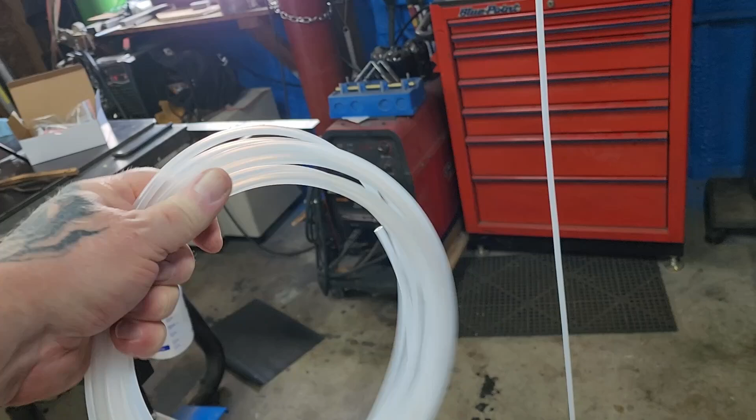So I got a lot of coil in that tubing, so I'm trying to straighten it out. That's one section of tubing that will extend between the radiator blocks. So I'm applying some warmth to it and just kind of massaging it. It's not going to be perfect, but the straighter I can get it, the better.

In the middle part, I'm going to go ahead and put a bend in it just to make sure that I can come from here, wrap around, and go back in. I'm just working at it. So I got 18 of these I got to go through.

Once I get them like this, then I can start getting them fed in. I got these kind of secured for now with that. These will be glued down.

Okay, so I got all of these cut and straightened out. Murder on the hands. So I need to still have a way now to kind of hold these up so they're not all sagging down, but I think you can kind of get the visual now.

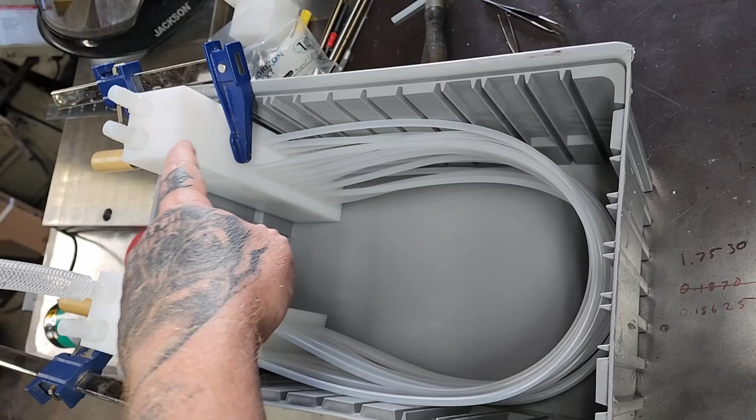So this will have water up to here, so water will flow in, split, come into these two channels, through these tubes, around, out, back into a splitter, and back up to the anodizing tank. So now you can kind of get the idea of how this is working.

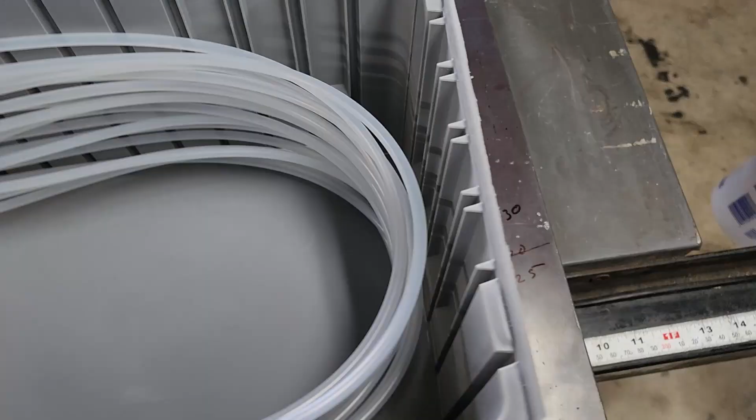So the next step is to get this ready for glue once this is all glued together. And then I also have to figure out how I want to go about supporting these hoses so that they stand up a little bit. They're all a little different in length here because the holes that I drilled and reamed, they're all kind of different.

I didn't set the stop on the milling machine like I should have, relying on tape on the bit instead. But it's no big deal. It doesn't have to be perfect, you know. There's plenty of water to go around. So I think I got plenty of surface area.

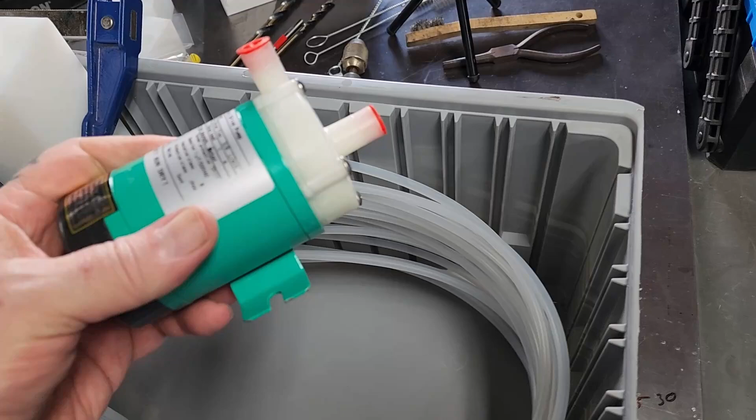And then what I've got is, this is the pump. So I got two of those, and I've got one pump which will circulate for this, and that pump will be hooked to a temp controller, so when the temp gets to 68, 69 degrees, the temp controller will turn the pump on, circulate the anodizing bath through here, back to the anodizing tank, and cool that down.

Once it gets back to 60 degrees, whatever I decide, then it'll turn off. The other pump will circulate the anodizing bath, the electrolyte inside the tank, and just keep it moving while I'm anodizing. So that's pretty much the deal.

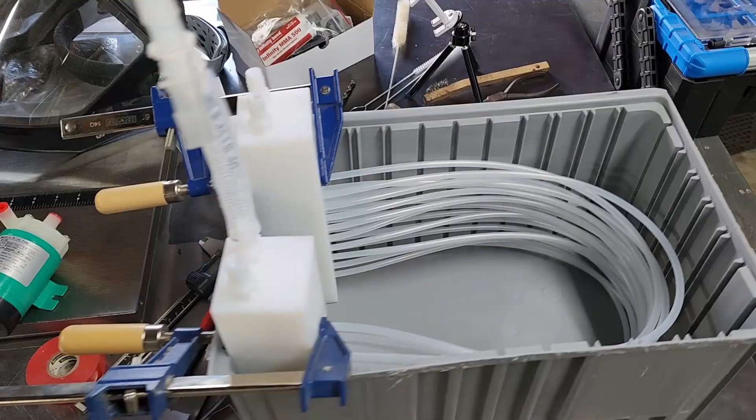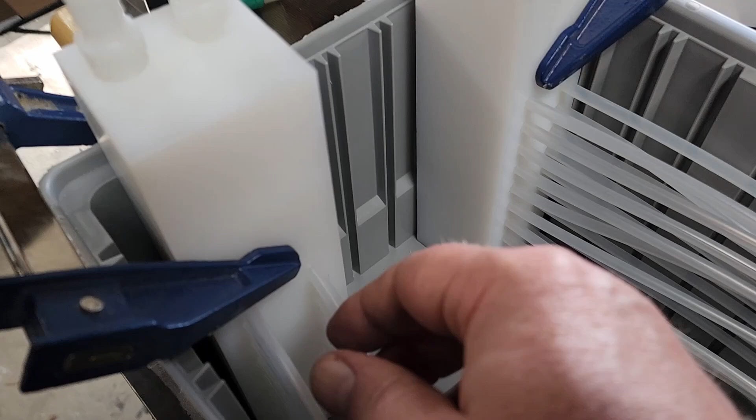I'm not going to be ready for gluing today. I'm thinking maybe Saturday. It's Wednesday today. I have to think about how I'm going to glue this tubing in here, because if I just put glue on there and then push it in, it's just going to squish all the glue out. So I have to do a little thinking on how I'm going to make that work.

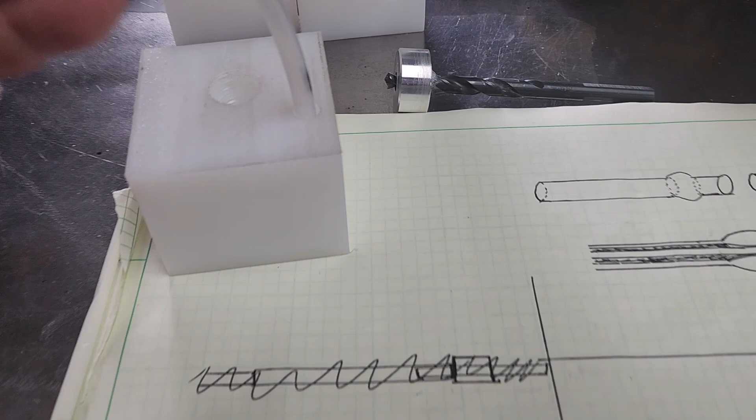All right, so I figured out what I'm going to do. I don't know if you can see real well, but I got a pocket drilled in the hole there. This is my test hole.

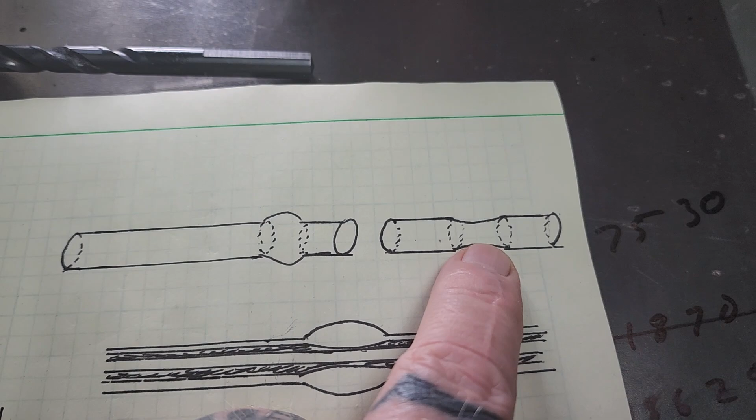So what I was originally thinking for these holes, in order to glue this tubing into the radiator block, my initial thought was inside the hole there, I would cut out a little pocket like that and then chamfer the tubing, and then when it plugged in, I'd have something like that. So that dark area is the tubing, and then the glue would fill in there.

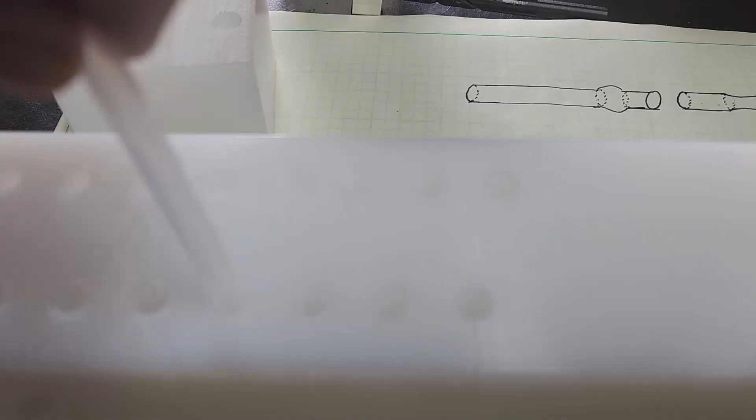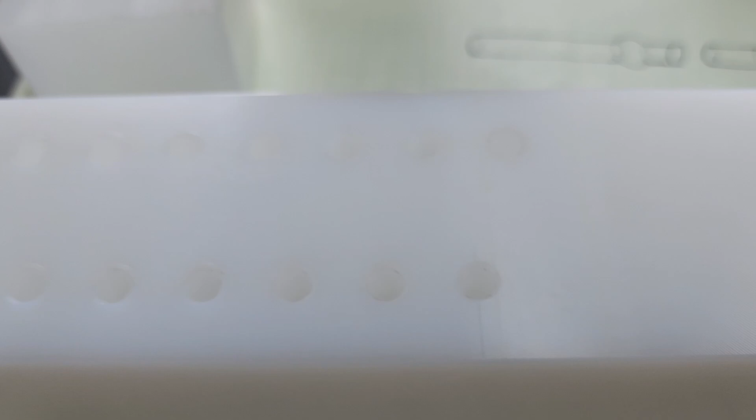But of course, the problem is that it's a really snug fit, and to get any glue in there, it's going to be really hard. It's just not going to want to go in there no matter what I do. So just gluing on the tubing and then pushing it in is not going to leave very much glue, if any. It's like I'm just going to wipe it right off. So I'm sure I'd get some glue in there, but it wouldn't be nice and full.

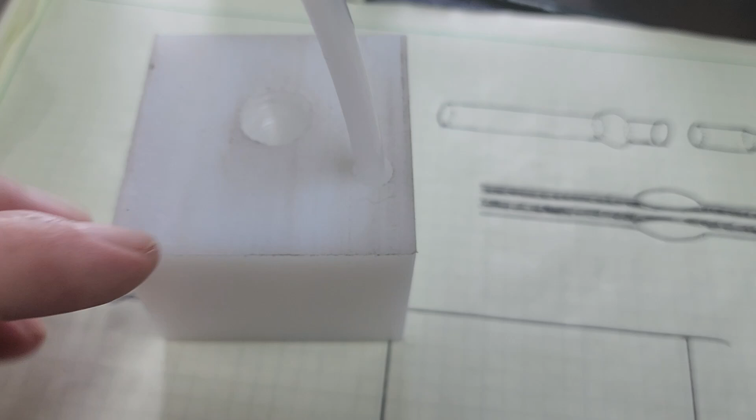So the idea is that I will partially insert the tube, not all. I'm not going to push it all the way down. I'm going to only get it started in the hole. Then I'll apply the glue in the pocket, and then once the glue is applied in the pocket, I'll push it down. And that'll give me a large amount of, a decent amount of glue.

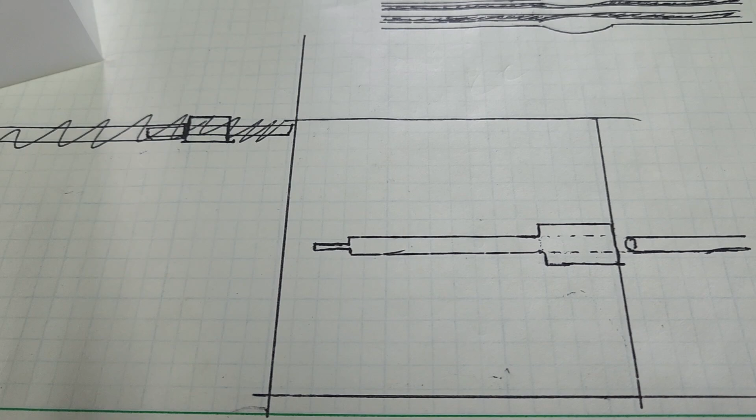It'll be fully glued. With the tubing, I'll just scruff it up a little bit, and that should help give it some extra surface area to hold. And then that's the size of the drill bit.

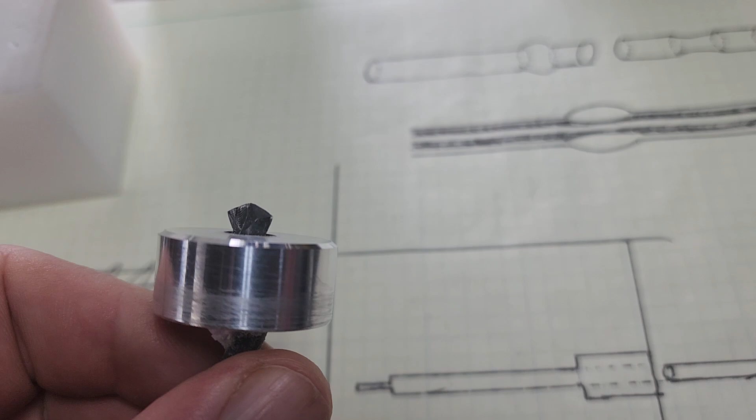And instead of using tape, I had to make a hard stop because this will grab and go much deeper than what I want it to. So I only want it to go that deep. So I made that hard stop and kind of glued it in there with super glue and baking soda, but it should be fine. And then after I'm done, I can knock the thing off and that glue will come off.

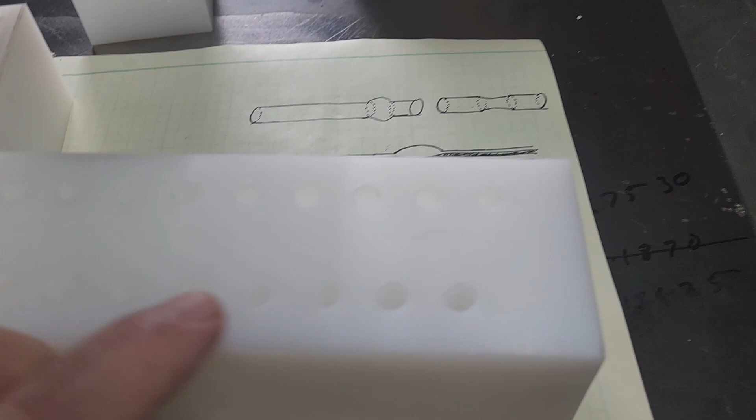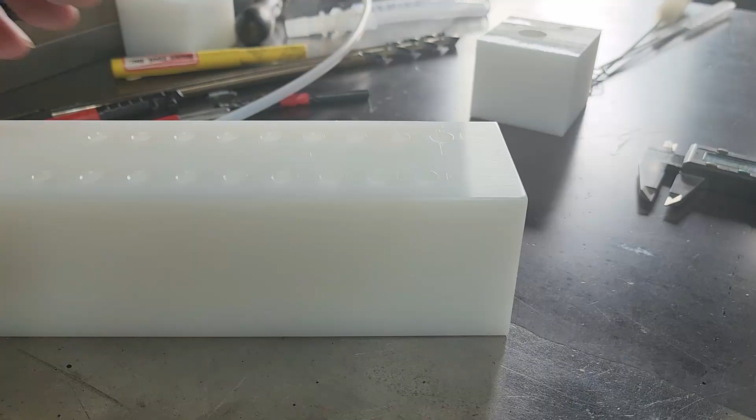That's the goal for today, is I'm going to be drilling all these out, getting them ready for glue. I have one other thing that I'll need to make, which I'll show you later in the video. Of course, the plastic embeds itself inside there, so I got to pick it out before I go to the next one. Really hard to see.

Yeah, that worked out really well, with the exception of having to pick the little chips out of the drill bit after each time, but that's pretty good. I'll give that a little deburr and that'll be ready to go.

The other one, I'm just going to do off camera.

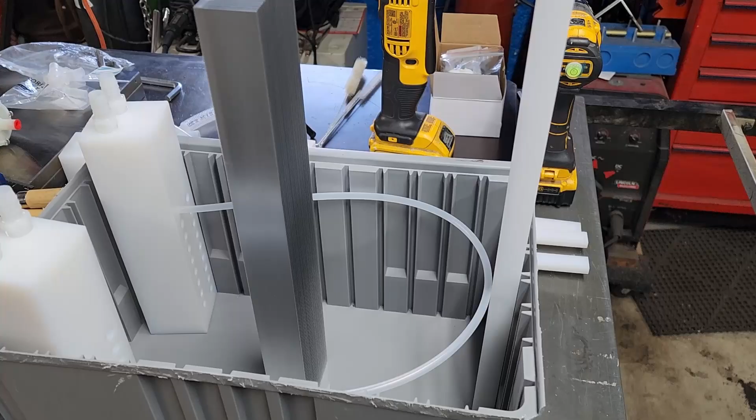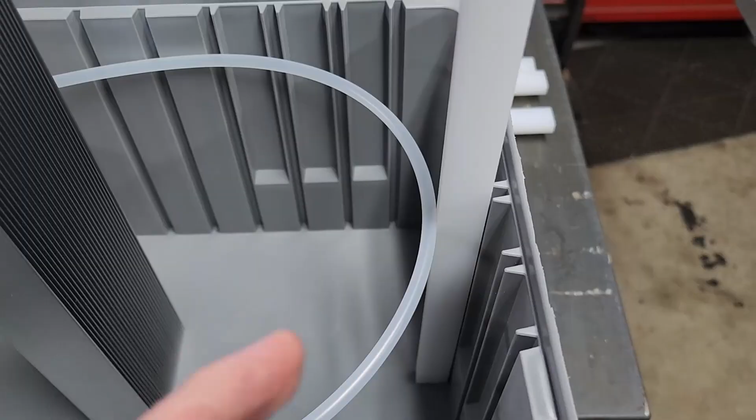Well, I had to order a few things, like this plastic strip. Got a bunch of it sitting over there. This, of course, will be cut down, and I'm going to drill holes down there so that it'll basically hold the tubes up. It'll support them and keep them apart from each other, because they kind of bunch up at the end and sag down, and that's not what I want. I want them spread out and supported.

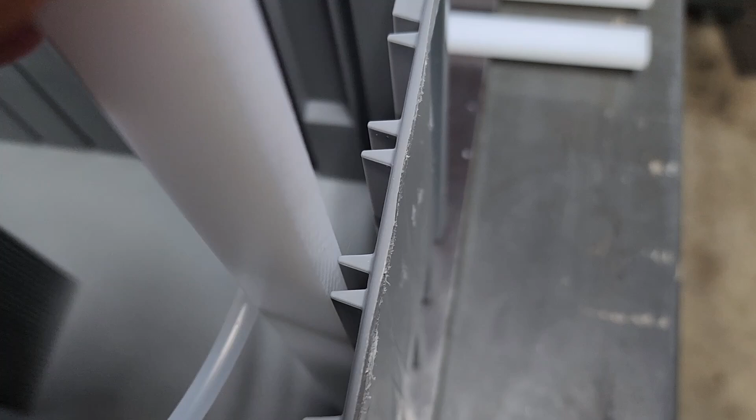Little problem is this is the center point. I'm not sure how I'm going to glue that to there. I'm probably going to have to create a bit of a base for this to sit on. I'll have to think about this, how that's going to go.

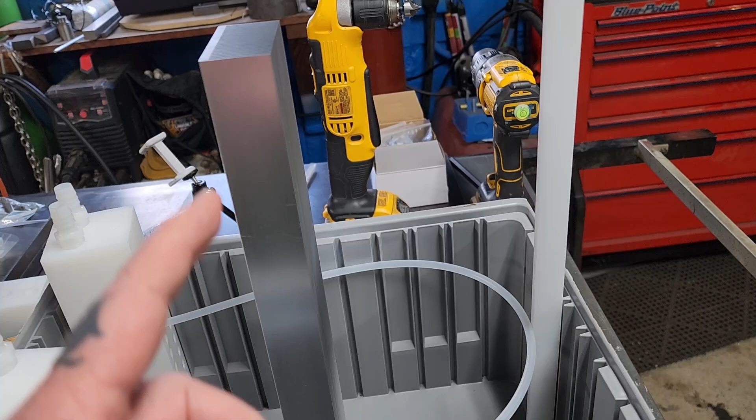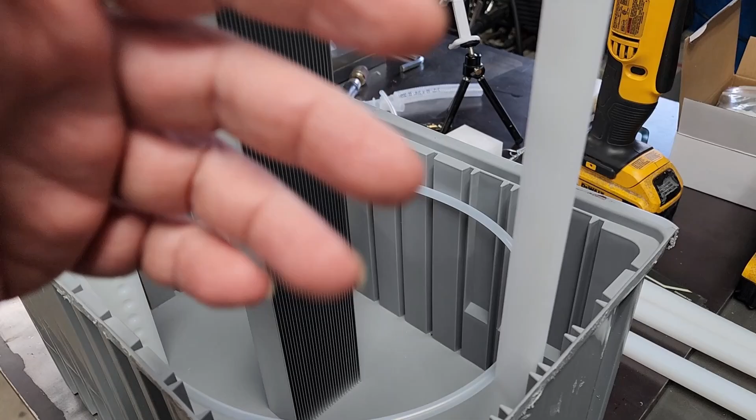And then I got this really, really long heat sink. So this is all going to sit in the mini fridge. This is definitely, I'm pretty sure, going to be too tall, so I'll have to cut it down a bit, but I'm going to keep it as tall as I possibly can. There will be a little electric computer fan that will be blowing the air around. The deal with this is to aid in cooling the water as quickly as possible.

And I might get another one of these just to have two in there, because as it stands, this isn't really that conductive. So the surface of the water will take most of the cooling from the air circulating around. This will get hit with the air and transfer that cooling deep into the water. That should help quite a bit.

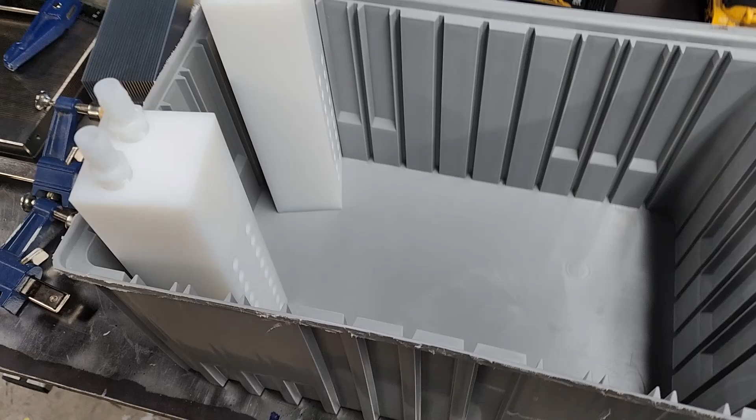So the next step is to prepare for gluing these blocks. They have to be laying flat down, so these blocks will have to be laying down when I glue them, because otherwise the glue will run out. So I am going to have to glue in 2 stages, unfortunately. I got 2 nozzles in the glue, so we'll have to make them count.

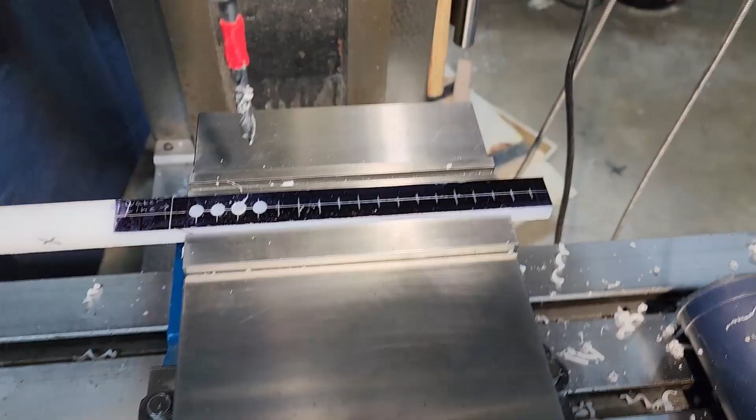Almost there. Got a little bit of planning to do, a little bit of figuring out, and then we can go forward. So this is what's going to hold the tubing. I've marked it off. Got 18 holes I got to drill and ream.

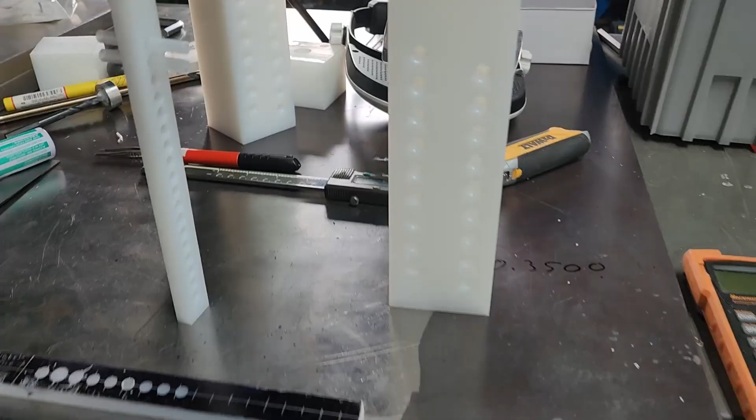That's the water line, and then I'm going to cut it off right about there. So I have this piece done, drilled and reamed.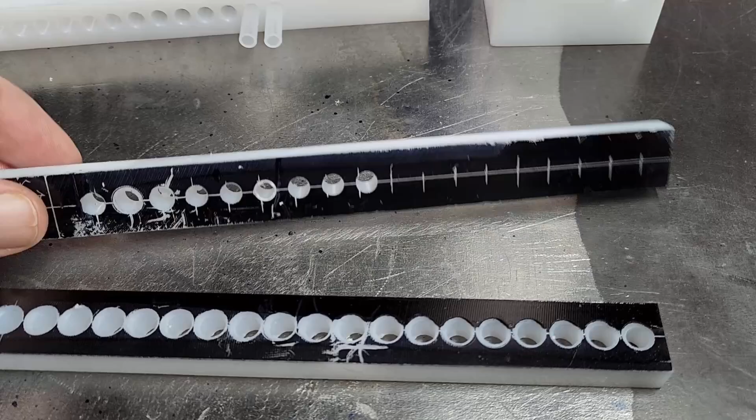So this was the first mistake, and as you can see, my drill holes are extending where they shouldn't have gone, and I measured and realized that this wasn't going to come out right because I had 18 holes. There's 18 holes here.

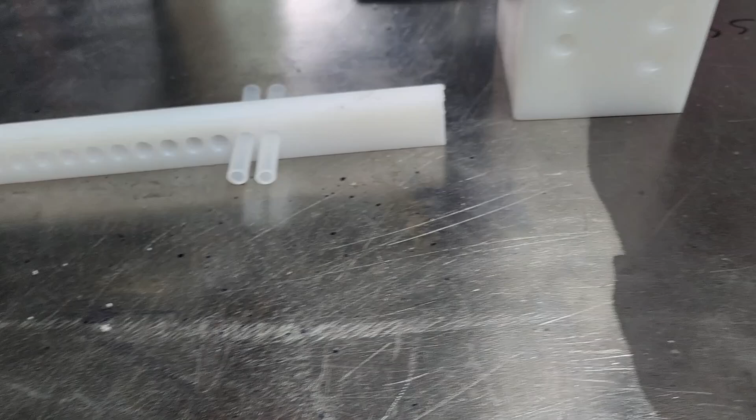Well, as you can see, that's the water line. So those tubes have to be between the water line and the bottom of the bucket. So yeah, I would have run out. I wouldn't have been able to make a full 18.

This one came out, I somehow messed up. I don't know what I did. I started with this hole first, and I ended up going all the way down to here, which was lower than what I should have. It should have ended like that, but I figured, that's fine, it's not a big deal. The tube will go in there, no tube, water can go through there, whatever.

But then I went back here and I had to drill that, which was fine. But what I did wrong was I took it out of the milling machine and I hand reamed all of these holes.

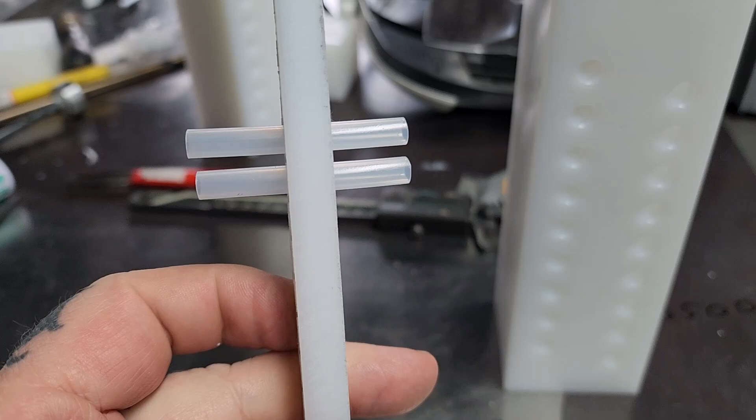So those tubes, when I test fitted them, let me see if I can prop this up here. As I was test fitting them, the tubes were sitting at an angle in all the holes. So when I hand drilled it, I drilled it crooked, or hand reamed it crooked.

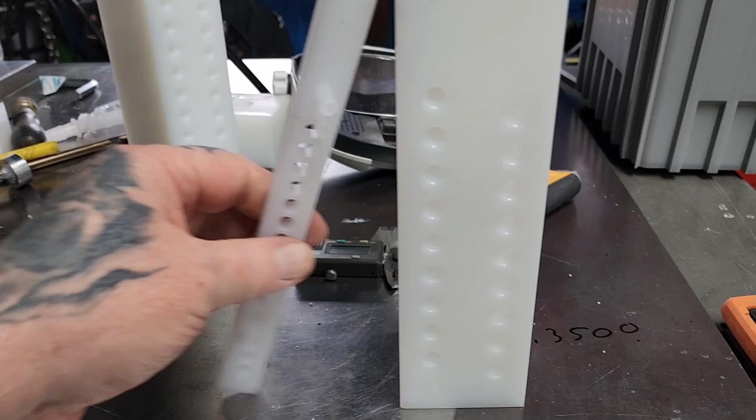So I had to scrap that because I need them to be nice and straight and square. This was the 3rd attempt - 3rd time's a charm. I usually don't make mistakes and have to repeat myself like this, but I had the extra plastic, thankfully I didn't have to order more. So there it is, it's all done.

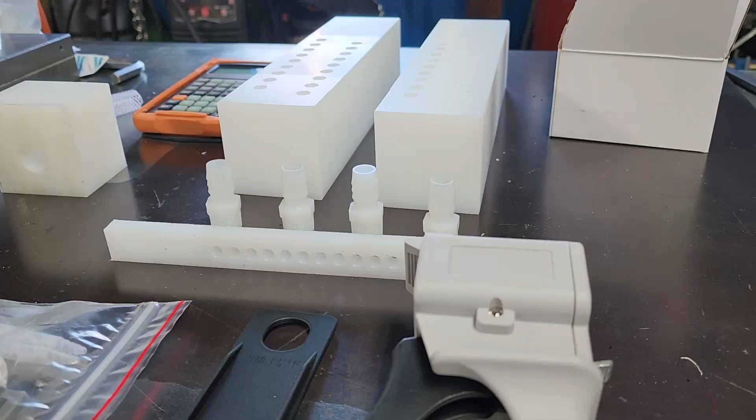I am at the point now where I can start gluing, so everything needs to get washed up really well, and then we'll start gluing stuff together. So I've got everything ready to glue.

I re-cleaned these radiator blocks, and I went in each hole with a bristle brush, cleaned it real good with dish soap, let it dry all day. I cleaned the threads on these. I didn't clean this because none of this is going to get glued - this is just going to hold up the plastic tubing.

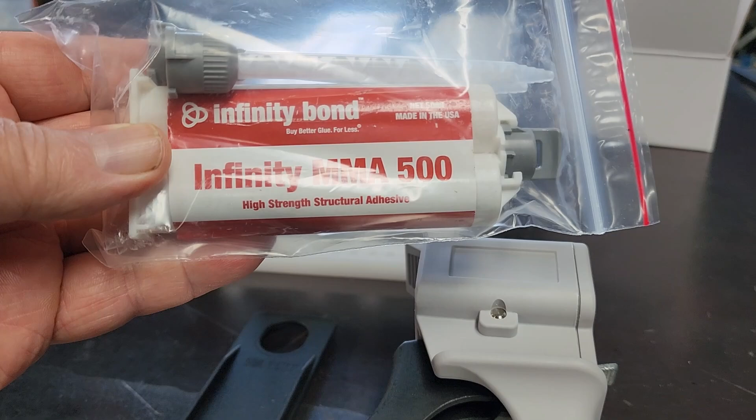The glue is the Infinity Bond, Infinity MMA 500. They have different glues for different plastics, but this is for the polyethylene plastic.

So the first gluing that I'm doing is going to be the tubing into here, and I have to have these laying down. I'm gonna do these first and then put my tubing in. It has to be laying down, and I'm also going to do a test gluing in that hole there. So when it's dry, I'm going to see how much it will take to pull out, because I don't want to have to do it to one of the holes.

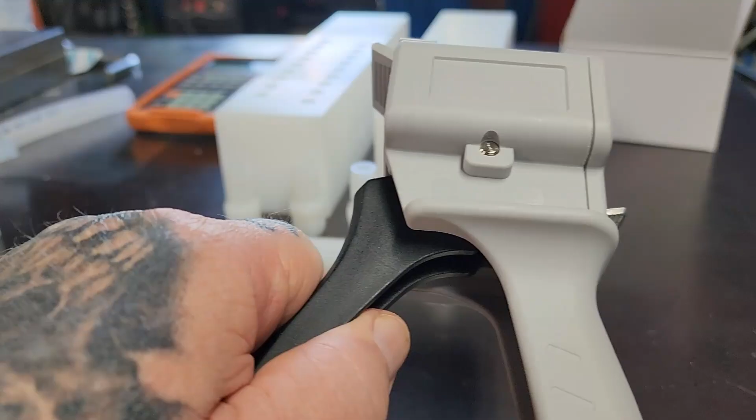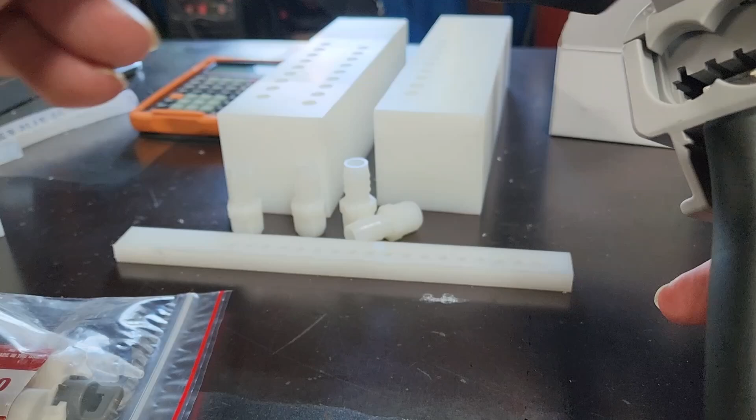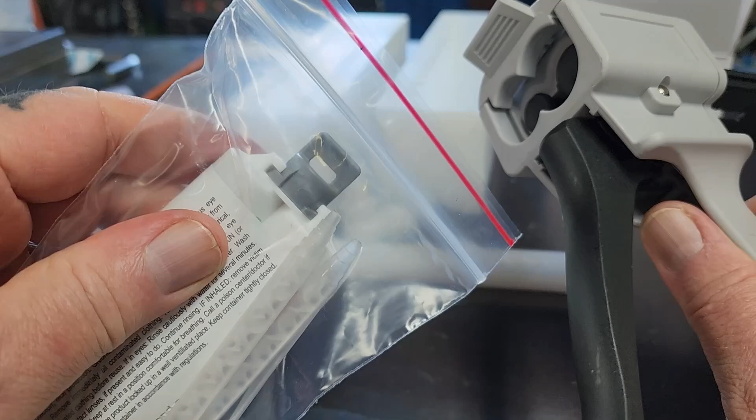This glue thing here is pretty interesting, really nice quality. You've got this pusher stick, and on the back you've got this little thing that releases the lever, and this only goes in one way - see the little doohickeys there? That's how that fits in, like so, and then this is going to go and plug into here. And this also has a nice cap so I can reuse it, because once I use this nozzle, it's done - I can't come back to it the next day.

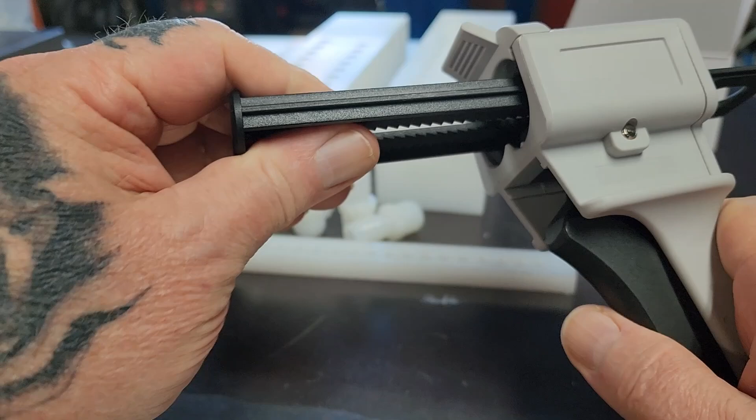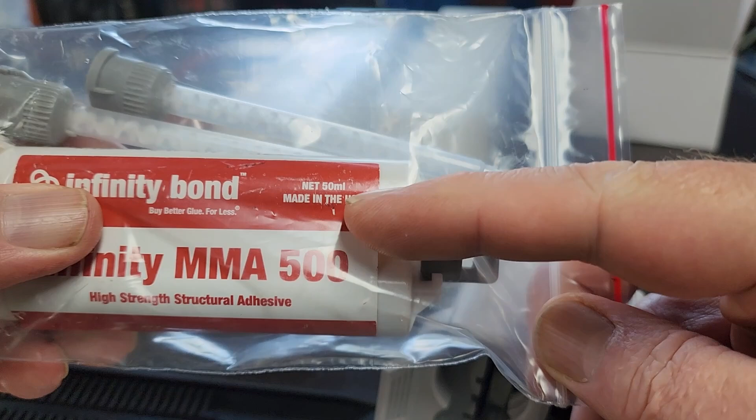It's throwaway after that. I believe you can use this on other glue things that are like this, other two-part adhesives you buy - I'm not sure, but I'm pretty sure. It's pretty straightforward, very high quality here. I mean, this is really nice, it's heavy, it's not cheap at all. And one thing I really like about this is right there - made in the USA.

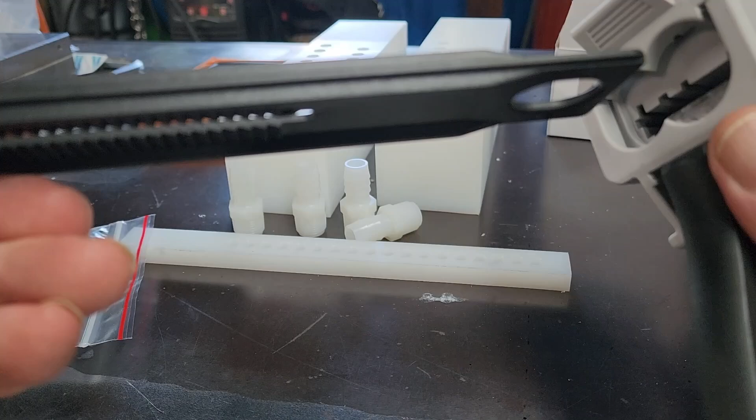Take that, China. So just go ahead and load that up.

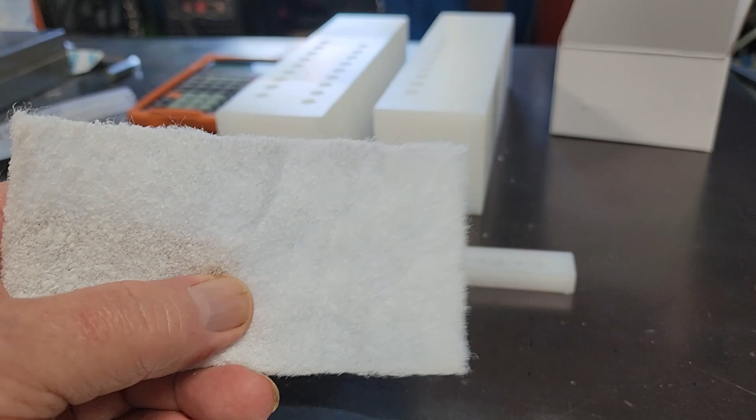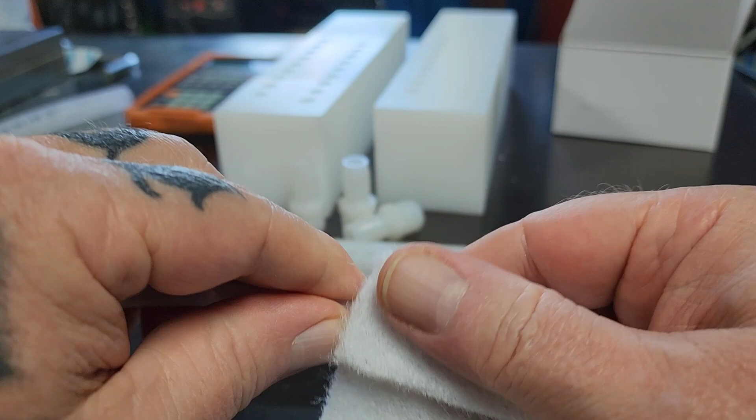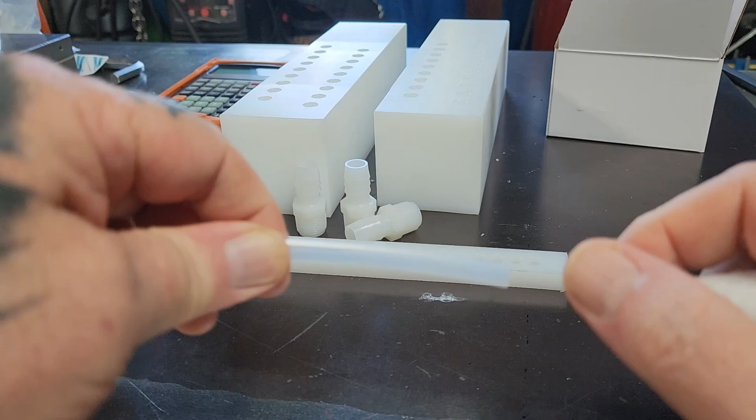So I got some scratch pad, or whatever you call it - it's mild, and I washed it really good before I decided to use it. What I'm going to do is on the tubing end, I'm just going to do that, and that should give me some scratches on there, give me some surface area. Kind of hard to do in front of the camera here, but I'm going to go through all the tubing, so when I glue these holes and push this in, the hope is that, because I'm going this way, the lines are going around, I'm going to trap some of that glue on here, so as I push it down into the hole, because it's such a snug fit, hopefully I'll trap some glue into the snug part. But as you can see, I've still got the wide part, which is going to hold the majority of the glue, and I still want to have surface area on there because this is such a small piece, so I want to give it as much surface area as possible for the glue to hold on to.

So I gotta do all that on all the pieces of tubing and kind of see how this works. I might have to go to a rougher piece. So I'm going to work on that a bit. It's boring, I'm not going to video it - I'm just going to get it done.

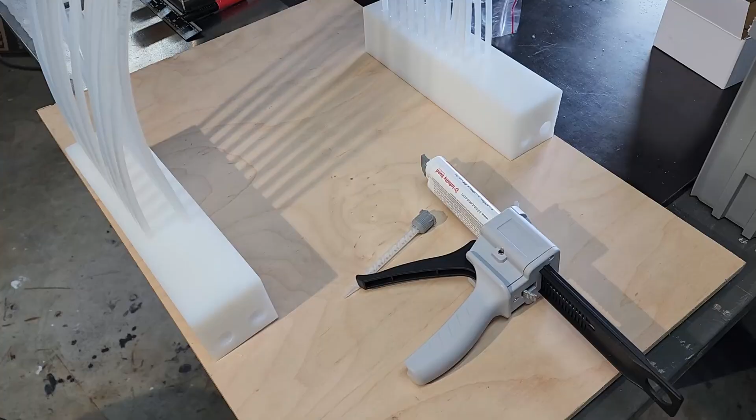Well, here I go, I'm ready to glue. Did a little test to make sure I could get in all around there, and I can. So I don't have these all the way pushed in. I'm going to go ahead and get the glue in the little wells, and then I'll push the tube in. I'm going to start here with the little pipe fittings, and then I'm going to end up here. There's the separator - that doesn't have to be glued.

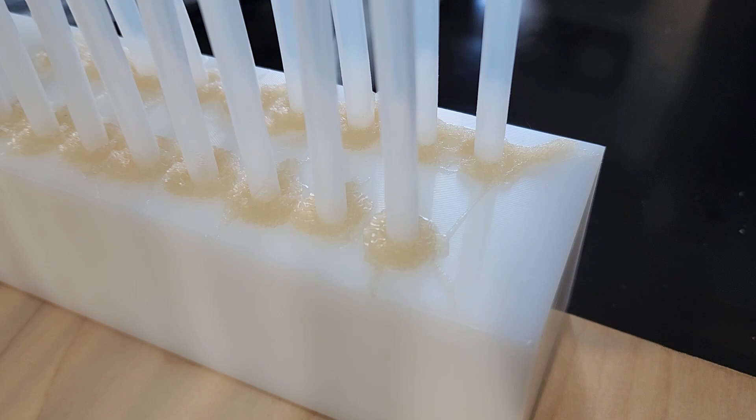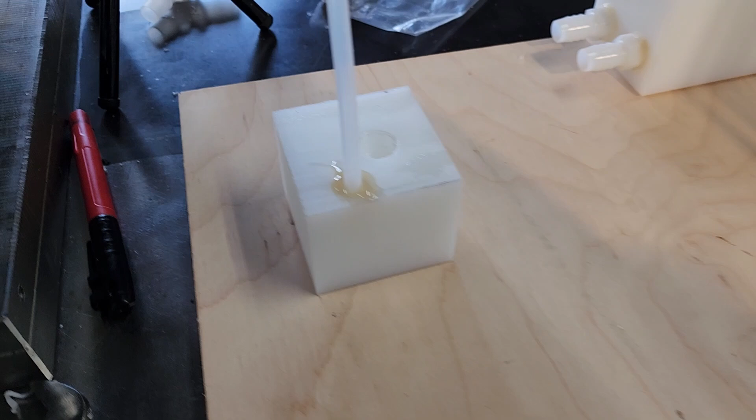So there it is. The glue starts to set a little faster than I would have liked, and it looks like it foams a little bit. I don't know how well I was able to get it down in those pockets - I probably should have drilled larger pockets, but with that foaming action, and plus pushing it down, I think it got in there just fine. Not the prettiest, but it just needs to work. There's my test. I'm going to give this a couple days and then I'm going to yank on it and see what I can do.

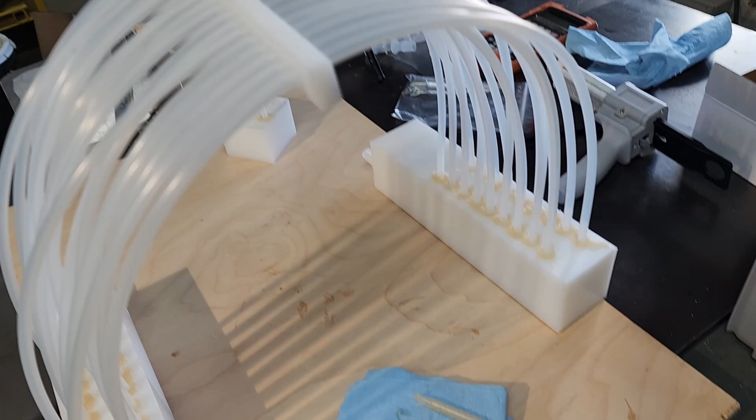Got those sealed in, so hopefully this glue does exactly what it's supposed to. After it's dried, we'll start adjusting this, getting it figured out where it needs to go. The next step, after that glue is dried tomorrow, I have to rough up the bottom of those, and those are going to get glued into here. So almost done - it's pretty strange how that glue is setting up.

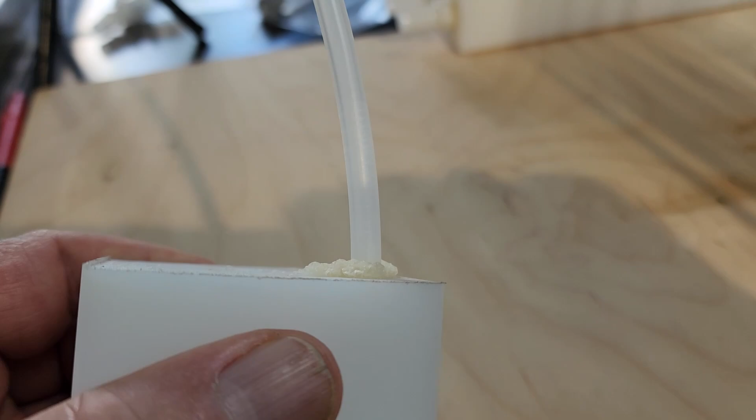I'm going to give this till tomorrow, but you can kind of see how it's shaping up pretty good. Hopefully this glue works. I did my little test piece here, and I'm going to attempt to pull this apart in a couple days. I'm going to give it a good couple days to dry. Then we'll see, but there's nothing in here that's really going to be high pressure that'll pop one of these lines out. And the fit is snug enough inside here that I don't think any of the anodizing solution is going to leak anyway. So I think this will be fine, hopefully.

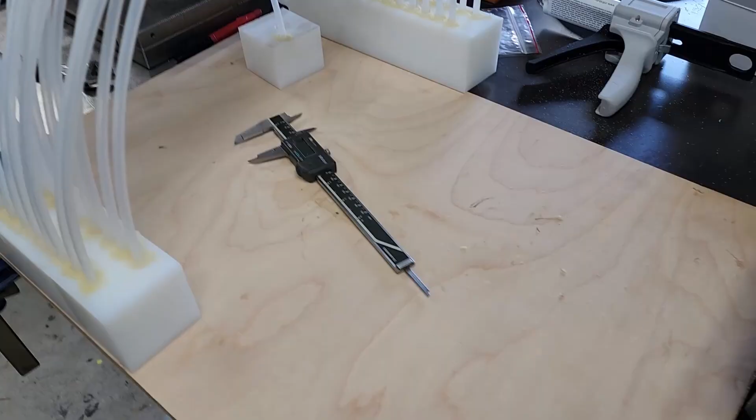So it's the next day, and I think this stuff is as hard as it's going to get. It's not rock hard, but I went ahead and roughed up the bottom of these surfaces here. It's really hard to see. And then I went ahead and roughed up the areas where they're going to be glued.

I washed it real good with dish soap, and then I followed it up with a cleaning with military grade alcohol, which is like 99.9999999% pure alcohol. It's really super dry stuff. So I'm going to set this outside, let it get good and dry. Any surface moisture being held in there will be gone. I'm not going to put it in the sun, but it's hot enough out that this should be nice and dry even in the shade.

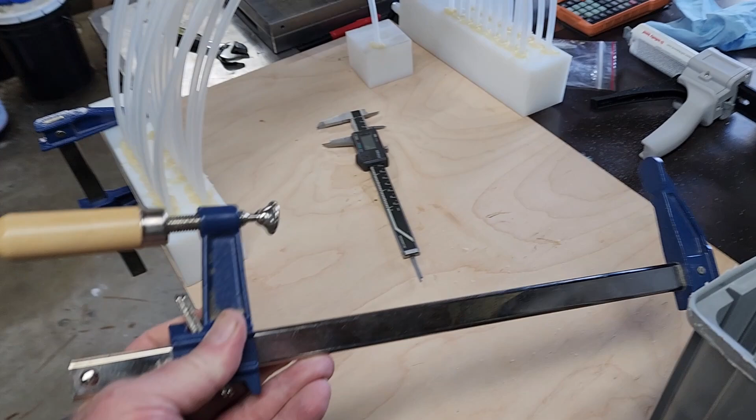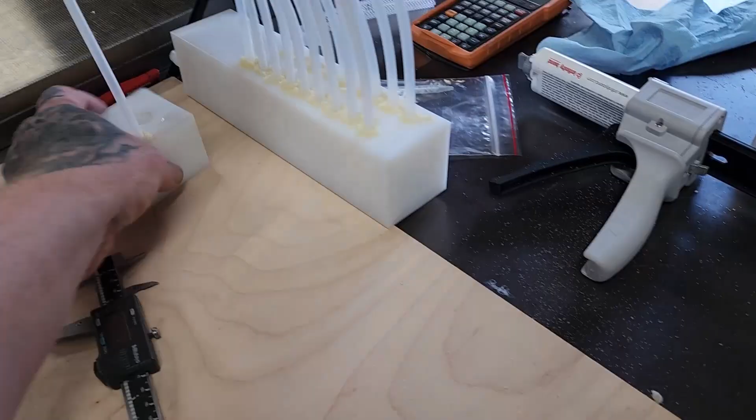And then I will be gluing these down, and I will be using these long clamps to clamp the towers down and hold them, and that's where they will sit until tomorrow. I've still got this block. I'm going to give it probably till next week sometime before I test it, try it out. But again, I think this is going to work. So far, what I'm seeing is doing what I had expected. So I think we're good.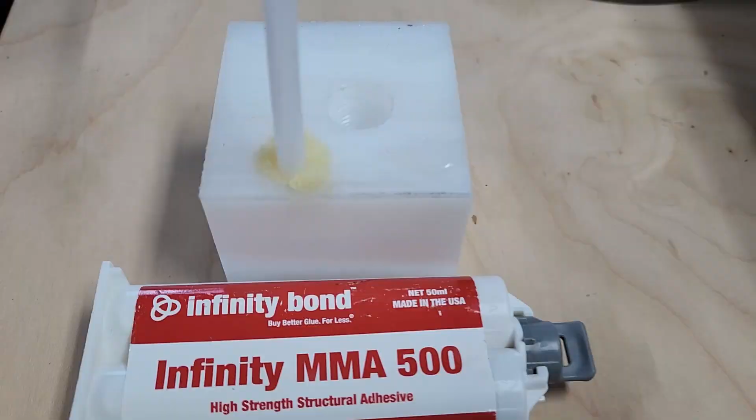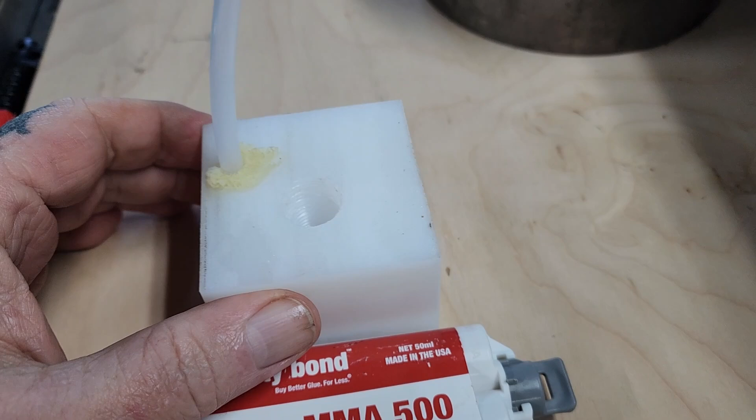All right, it's Saturday evening. I haven't had any time in the shop today. I've been doing yard work in the front lawn, but I've tried 3 separate times to pull this out, and the third time I tried so hard I pulled the muscle in my arm. That's how hard I tried 3 times, and this thing did not budge.

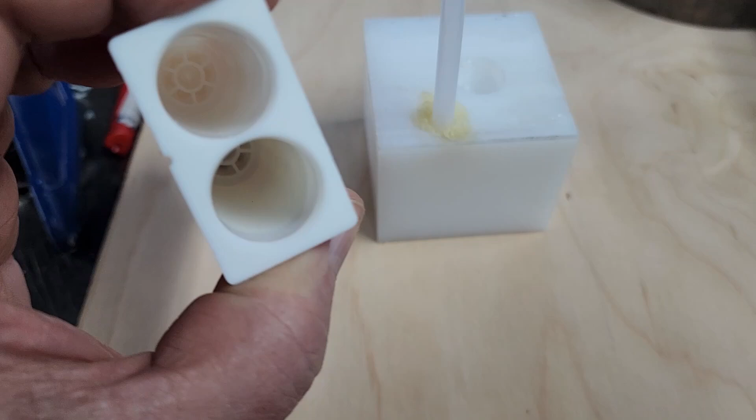So I think this glue pretty much lives up to exactly what it claims and does exactly what they claim it does. I used quite a bit, it's almost all gone. So I think we're going to be fine. My biggest concern really is these towers breaking free, but after what I just tried there, I don't think that's going to be a problem either.

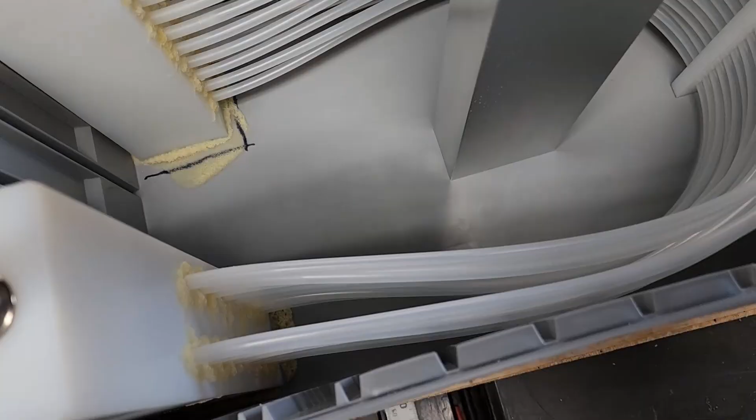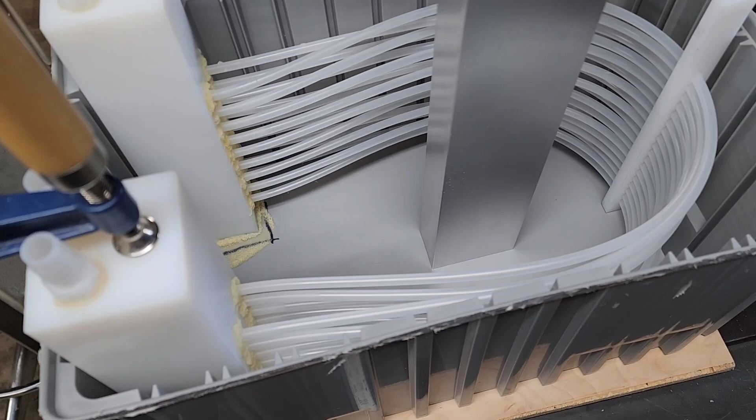So tomorrow or Monday, I got more yard work to do tomorrow, but tomorrow or Monday the clamps come off, and then I'm going to start installing this into the mini fridge. Once that's done, that'll pretty much conclude this video, and then it'll just be hooking up the plumbing, getting the pump running, and before I fill this with water, I will be doing some tests.

The anodizing tank doesn't have any sulfuric acid added into it. In fact, I don't even think I put any water in the tank yet. But I'm just going to put water in the tank, then I'm going to test how this works, make sure there's no leaks, and once all that works out, then we will go ahead and activate the anodizing tank with the 30% solution, or make it a 30% sulfuric acid solution.

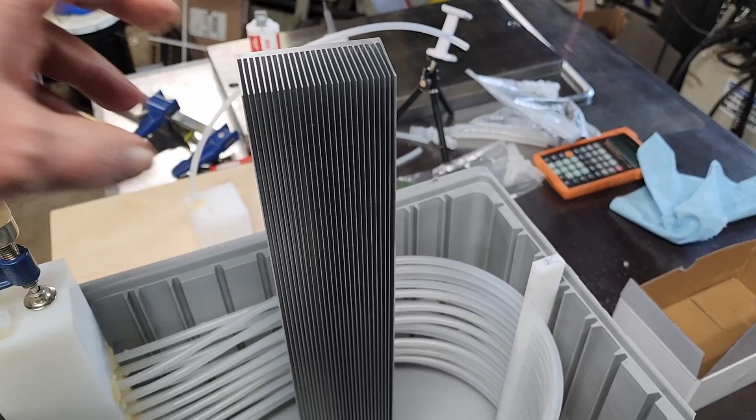And then this will get water, and this will get cut to size, because I'm pretty sure this is a little too tall to fit in a mini fridge. Next month I'm going to try to buy another one of these, or at least by the end of summer if I could have 2 of these sitting in here. Maybe not, I don't know, we're just going to see. But like I said before, this is just an aid to help get the water to temperature quicker. So yeah, I think everything is going really well. That turned out really well.

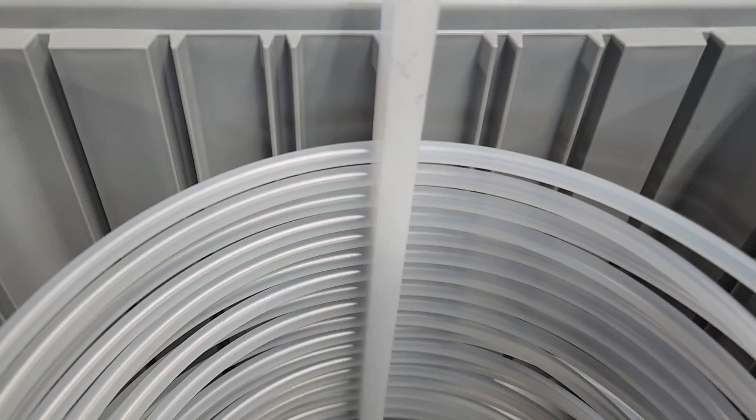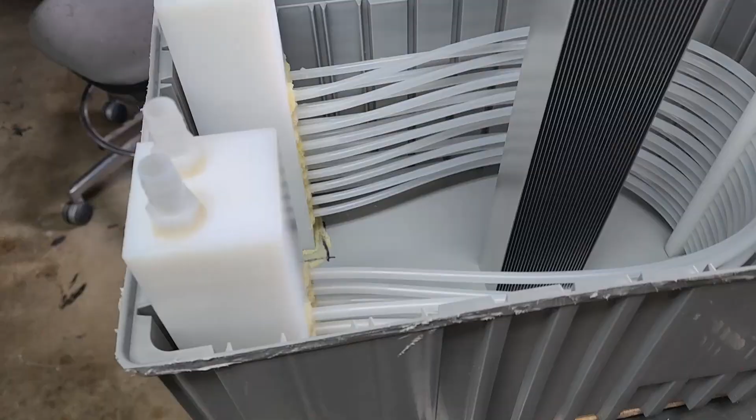You can see the nice separation that we got going there. No clamps. Good and solid, looks like it's gonna hold. So next stop is the mini fridge.

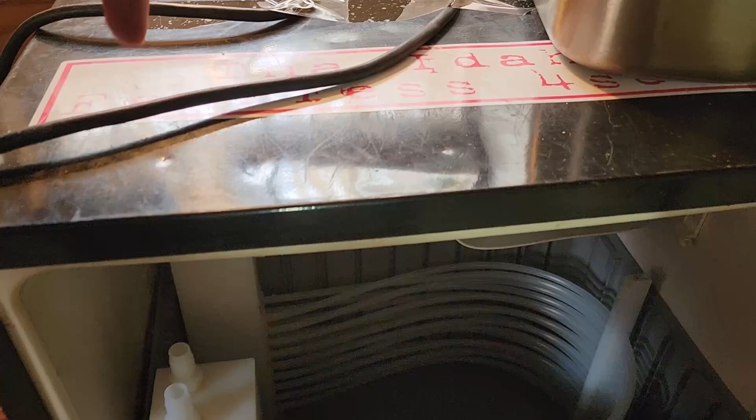It's a tight fit, but I can close the door, so that's how that fits. I will have to drill through the top in 2 spots for the tubing to go out. And then I'm going to set a fan, a CPU fan back here to circulate the air. I checked the heat sink, and it does need to be trimmed a little bit. It almost fits in there, but just not quite.

So I think for this video that's pretty much a wrap. Past this, it's just plumbing everything together now.